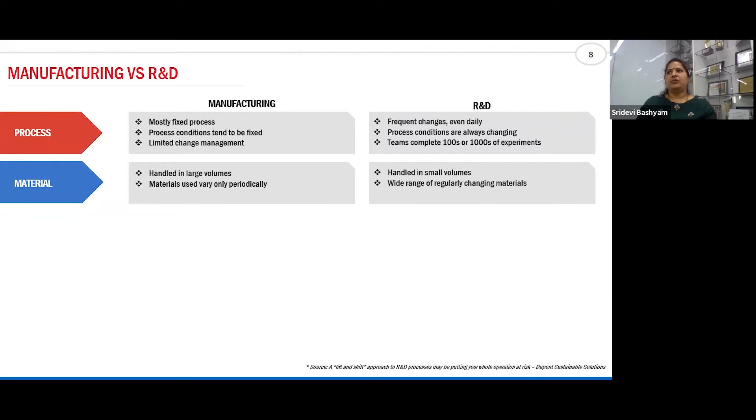And in terms of material, you handle large volumes, and we don't use that often. Whereas in R&D, we use very small volumes, but there is a wide range of chemicals. And incidents in manufacturing, as you all know, can be catastrophic and also impact the community as well. In R&D the severity may be lower than in manufacturing, but still it can be severe. And it can affect the business continuity and also the pipeline.

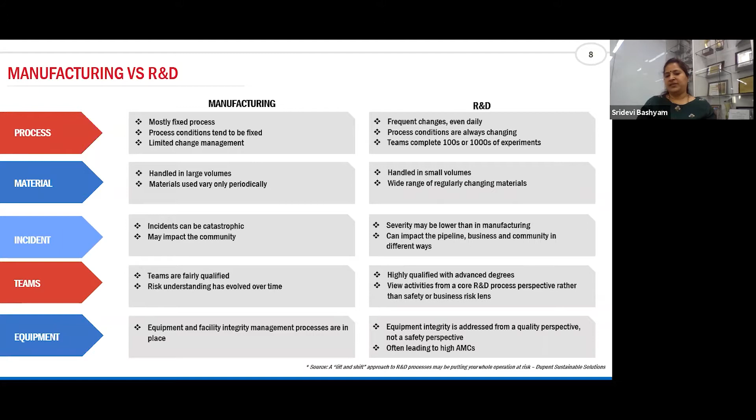Now, teams are all well qualified there. The risk understanding also has evolved over the period of time. Whereas in the case of R&D, we do have highly qualified people with PhDs and postdoctoral people working on the R&D. But when it comes to the core R&D processes, with respect to safety and quality, there is less awareness. And in case of equipment and facility integrity management, the processes are all well established. It is there in terms of quality, but from a safety perspective, we have to really have a deep dive in. So these are basically what we think is the difference between the manufacturing and the R&D processes.

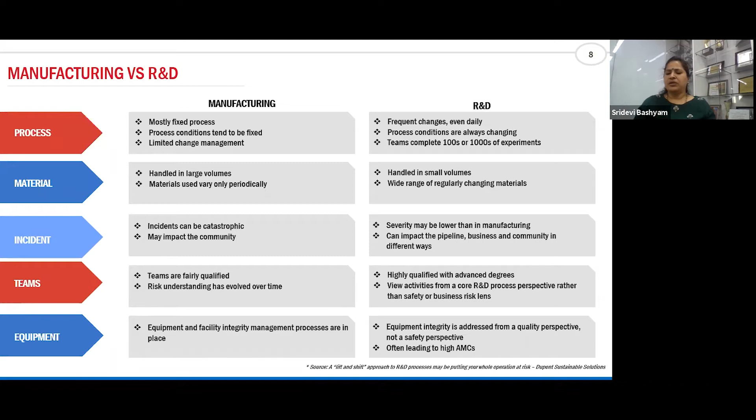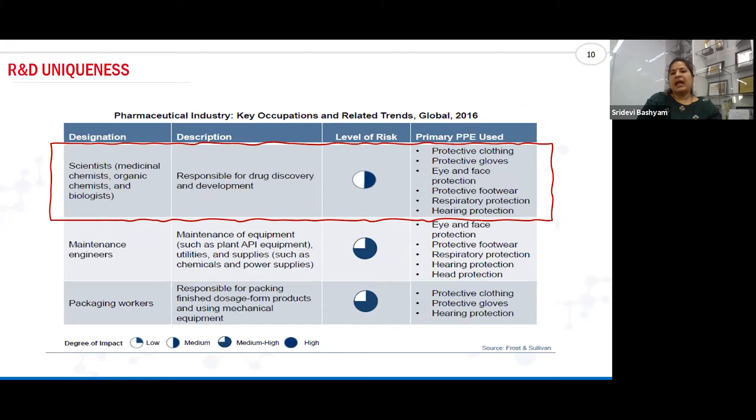And if you see, the level of risk with respect to laboratory workers, it's not that it's a less risk. We do have some level of risk there. And even in case of scientists, be it medicinal chemists or organic chemists or biologists, who are responsible for drug development, we still have some level of risk there. So what are the kinds of risks and challenges? The potential for fires and explosions, unexpected chemical reactions, asphyxiation or hazardous waste, exposure to toxic, chemical and biological or radioactive materials is very inherent to R&D. And there's also high IP related risk, as well as challenges with respect to regulatory compliance, supply chain management, and also business continuity along with this risk.

So if you see, in the earlier scenario, the customers were more oriented on the product delivery. As long as they got the product delivery, they were quite happy with that. But the scenario has changed totally at present. The customers don't see us as just a delivering partner, but more of a collaborator, and partnership is established between the client and the company.

So when we start with the cradle to grave concept, it starts wherever there is raw material generation and storage, where we do our reactions, or any experimental activity, where we need to see not only the products but also the byproducts, how we are storing the products, what kind of waste is generated, what kind of waste is emitted, and are we seeing exposure to our people and environment, and the disposal process, how the shipment of that particular material has to be done, and the transportation. All this is looked into.

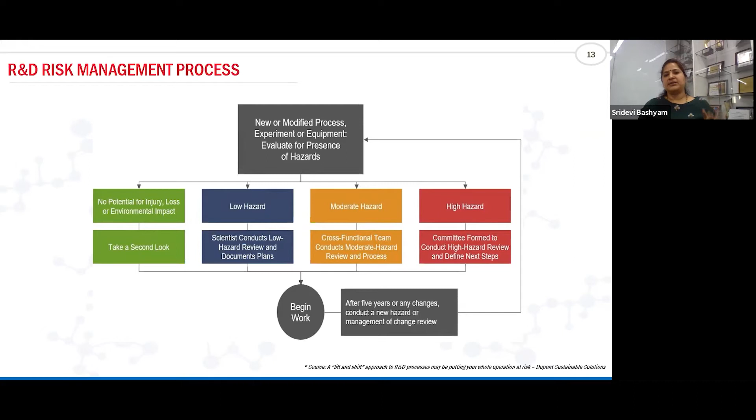First we have elimination, that is wherever the product can be eliminated, we can eliminate that process. And if elimination is not possible, we can substitute. For example, in our experience we had to use N-butyl lithium, which is a highly pyrophoric material, and it can be replaced with N-hexyl lithium, which is not pyrophoric at all. So those kinds of substitutions are possible. And in case any modification is required with respect to infrastructure or engineering control, that should be taken as a modification.

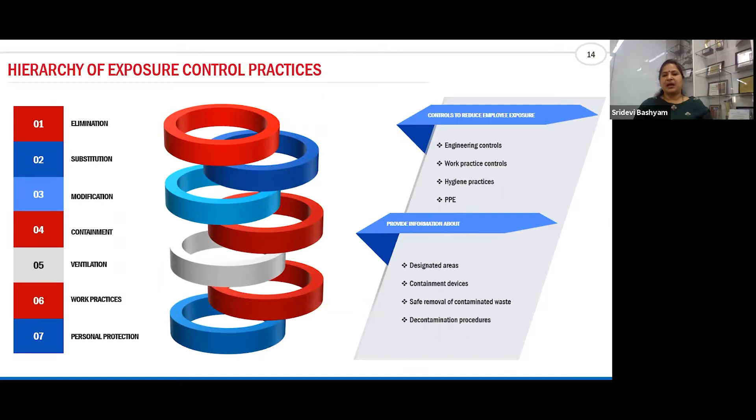And when I say containment, there are some designated areas. For example, when we are doing band 4 or band 5 type of compounds, how those can be contained, how those isolators, how can we develop a contained zone, even for hydrogenation type of reactions, how can we have an isolated and controlled area, and how we can improve the infrastructure, which is also related to ventilation. And work practices are more of procedures, SOPs, documentation, decontamination procedures, and what administrative controls you put in, and finally comes personal protection. PPEs are at the end, once these elements are managed very well.

So I'd like to shift gear a little bit to inventory management. On the inventory management part, sometimes it becomes very difficult to manage things in an organization like a CRO, where we have multiple clients and multiple requirements, and we deal with multiple types of products and raw materials. So what is more important here is on-time availability.

When it comes to on-time availability, the best procurement policy is a just-in-time delivery policy, along with information about the real-time status. How can we stagger the shipment and make it available to the user? In the case of a just-in-time contract, the vendors are ready to even have an open PR and then stagger the delivery.

In order to have this, the user has to have easy access to the inventory details, and repetitive ordering of these chemicals should be controlled by centralizing the inventory. Decentralizing leads to more accumulation of the chemicals or materials. Centralization helps in effective on-time availability and better management of inventory.

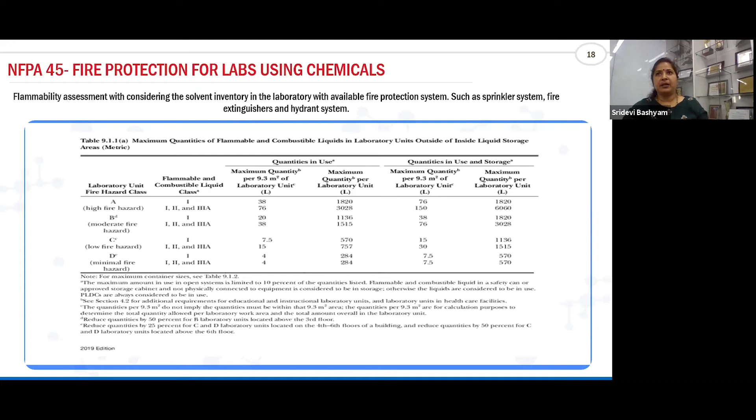activity we are doing. I would like to share one case study here. In Syngene, we evaluated the labs and classified them depending on how many solvents they handled. Initially, we had some labs handling larger amounts of solvents. For those cases, we used the just-in-time concept, centralized inventory and some infrastructural changes, and where the red zones were 2, we were able to bring them down to 0, and we were able to increase the green zones very drastically. So these things are possible, but we need to think of strategies for how to bring about this change.

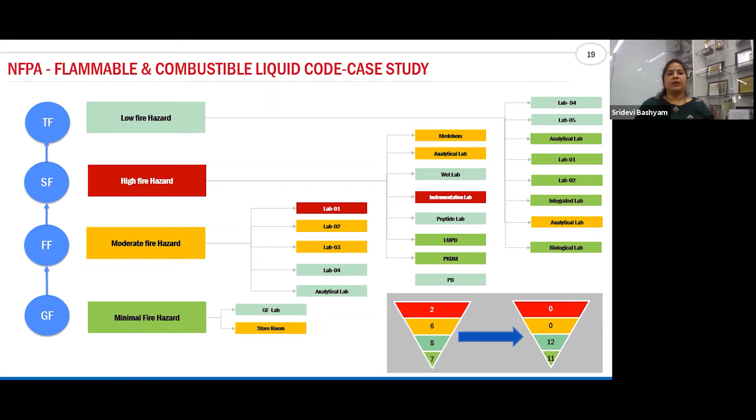So moving to chemical hygiene. Chemical hygiene has a 7-element program. So when we are in a discovery environment, an R&D environment, dealing with unknown compounds is very common. We deal with so many kinds of unknown new chemicals, and it involves unknown hazards. So reviewing the chemical evaluation of this chemical is very much required so that it can be communicated properly.

This communication, I think point number 2, 3, and 4 are kind of interlinked, where whatever the hazard with respect to a new chemical, how this is communicated, whether it's a teratogen. What I mean by teratogen is whether it is affecting people's reproductive organs. So whether we are handling band 4 type compounds or band 5 type compounds, we should be clearly aware of those and communicate them.

And in the SDS, if you see, there are 16 elements. People don't have to take into consideration all the 16 elements. There are 4 or 5 parameters which need to be taken. For example, the emergency response management: if we consider a chemical, what is the emergency response management parameter? How do we handle that chemical in terms of any spill? So these are the 5-6 important parameters when considering SDS management.

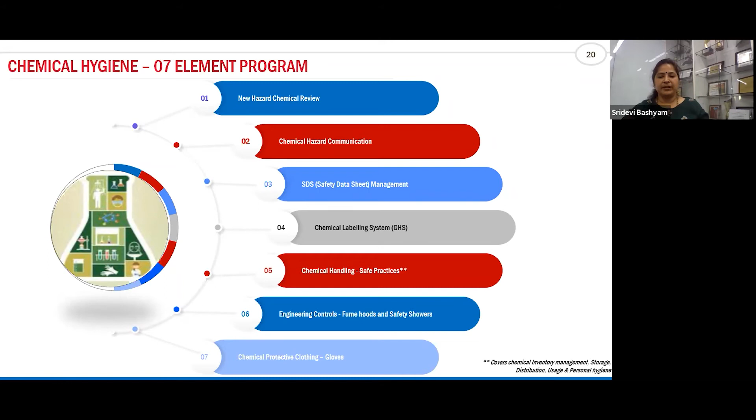And then coming to the chemical protective clothing, the PPE, particularly gloves. Here I will not be able to cover all the topics, but I have taken some examples from engineering controls and chemical protective clothing, that is gloves, and what should be the criteria. So if you see the engineering controls, there are 2 different types, and we need to clearly identify whether it's a low containment or a high containment. The primary control has to be kept in for all the high containment areas.

So for high containment areas, we need to be very sure that it removes contaminants, keeps them away from the breathing zone, and is very energy efficient and cost effective. Examples I can think of are the fume hoods, the spot exhaust or elephant trunk, and the glove box. When it comes to the low containment area, the worker is not very near, but close to the high containment area, but the toxicity is low, and the contaminant generation is more uniform.

We need to consider what the standard says: 8 to 12 air changes depending on the lab type. So this has to be met. And then we need to have clean, fresh air pushing down, and the air changes have to be checked regularly. And what about the fume hood face velocity, whether it lies between 80 and 120 when working with the fume hood; the user has to be very conscious. The first thing he has to do before starting any activity is to check whether his hood velocity falls in this range. Otherwise, he should not work in that hood at all.

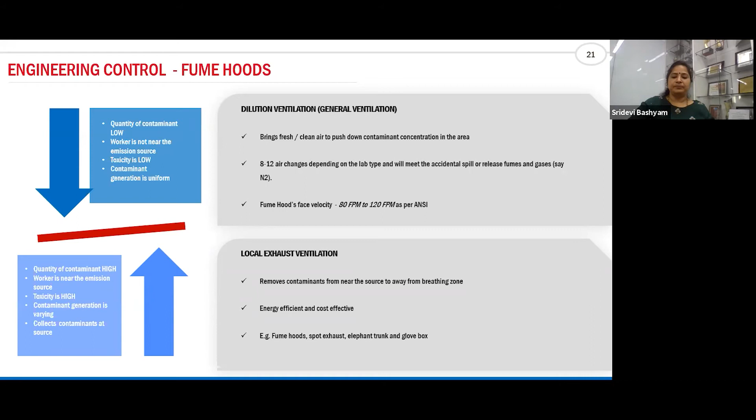Now, what are the risks involved? Generally, chemists, because they're frequently working in the hoods, don't have the habit of lowering the sash. But that will increase the risk of exposure, because there is inadequate airflow, and it will not serve as a protective shield. So this has to be taken into consideration. And also in times of power outage, which does not happen frequently, he should be aware that the employee exposure will be more.

So he should immediately secure and then evacuate the place, and always maintain that the sash door is lowered to whatever the safe level is. And generally they have the tendency to store some tissue papers, aluminum foils, and some materials in that hood. This will block the airflow in the hood, which will expose the employee more. So those things need to be avoided. These things have to be kept in mind while people are working in a fume hood.

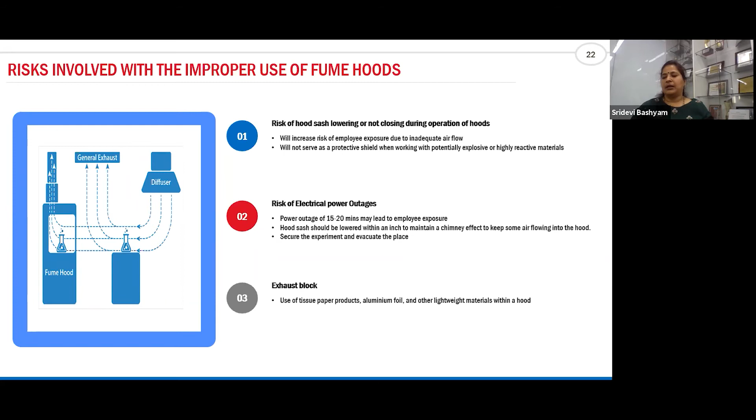So coming to the next item, that is the gloves part. Most of the time, if you see, the employee exposure is mostly because of wrong glove selection. What we think is one glove fits all. In biology, probably nitrile gloves are very suitable, and only in 5% or 10% of cases where he has to deal with very biologically sensitive things, he can have other gloves. But in chemistry, we have a variety of chemicals, and there's always a lack of knowledge on the glove material, and we should have some selection criteria.

I would like to quote some examples here. Based on the nature of chemicals, one needs to choose the gloves. For example, nitrile gloves cannot be worn if you are using nitric acid; neoprene gloves have to be used. When it comes to bromobenzene, we need to go for Viton gloves. So for the selection criteria, we need to assess the hazard. We see so many types of material, like cut resistant gloves; so many injuries happen because of glass cuts while washing the apparatus. So we should insist on cut resistant gloves.

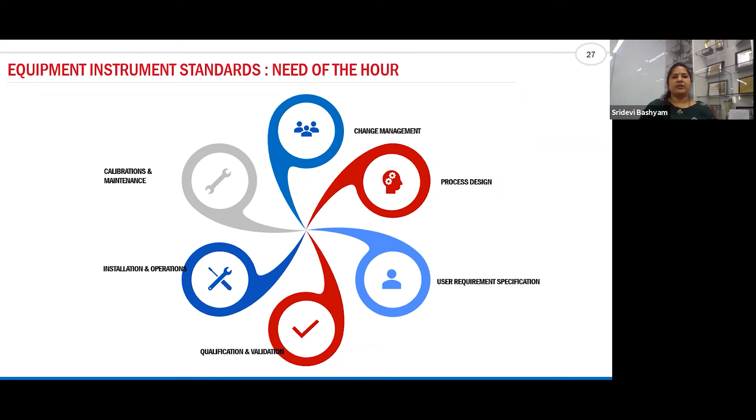And if the UV lamp needs to be changed in 4,000 hours because the calibration is not proper, we need to change it. We cannot go with what the vendor is saying, right? So all this goes hand in hand with the equipment standards for an R&D.

Well, now we have talked about the standards, the best practices, and now how to manage and sustain these standards. This is very important because for the success of any organization, implementing best practices is not sufficient. How can we have it sustained? Continual improvement has to happen.

So for that, the first is the governance and the structure. What I mean by governance and structure is how do we really get this going? Whether it is a top to bottom approach in an organization, flowing from the top, it has to work both ways, come from the top as well as go from the bottom.

Once we have established the governance and structure, we need sustained training on that process. That training is really important because in any well-growing organization, year on year we see some 20 to 25% growth. At the same time, we also see an attrition of 12 to 20%. So the population is constantly changing because we are getting new employees and losing old employees. Unless the training is efficient, we'll not be able to achieve continuous improvement.